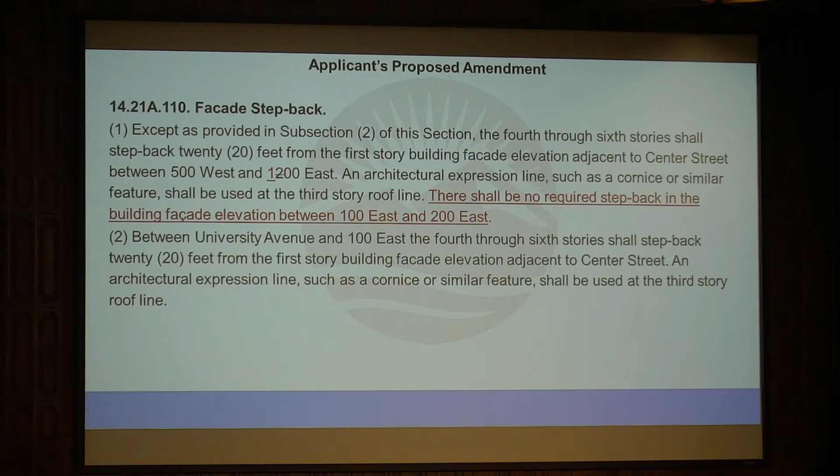Some of the reasoning behind that would be to help development utilize the space along Center Street to its most potential, increasing the amount of floor area in a new development, rather than having that stepped-back area become void space along Center Street. It would also help anchor the corners with buildings that have a more substantial presence, so people coming into downtown can feel a sense of arrival, by anchoring those corners.

Some other concerns might be protecting the historic district, which we want to make sure we're doing in our historic downtown. That will be handled through existing design standards in our code, which help protect the character that's there now and what we want to see there. Title 16, our landmarks preservation title, will also govern how historic buildings are treated and protected from undesired development.

Also, another thing would be able to establish some variety in building height along Center Street, so that we don't have a continuous 3-story level, but that there's some fluctuation, bringing variety and character. Currently that's there, but we want to make sure we're able to promote that as well. So those are some of the reasons why staff would recommend approval, but that it apply for the whole DT1 zone. I'd be happy to take any questions.

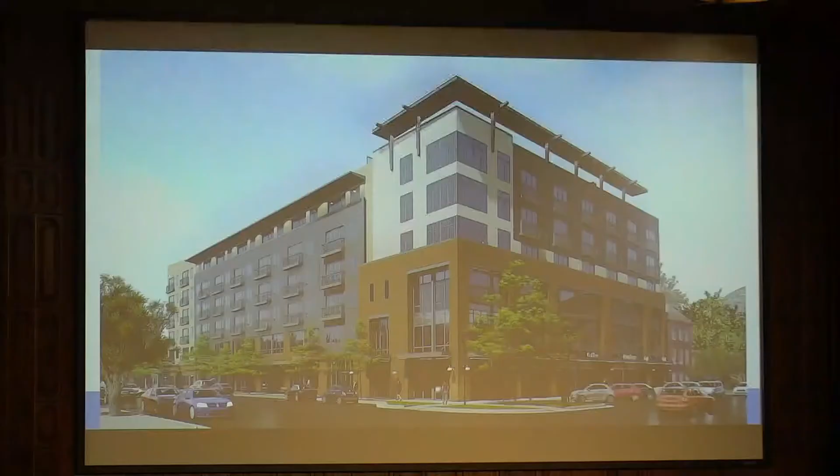Yeah, I believe the applicant brought some stuff as well that he can show. Okay. All right, here's a rendering of the proposed building on that block that the applicant's requesting.

Can you identify where this is? So this is on the street right here, 100 East, and the street here is Center Street. The old historic library, Carnegie Library, is right across the street to the west, and La Dolce Vita, the Italian restaurant, is right across the street also.

So this is where the gas station used to be. Yes, that's an improvement. And so the step back requirement currently would be applied here at the 3rd story and take out this area up here.

Are there any other questions for planning? Okay, if not, I'd like to invite the applicant, Mr. Christensen, to come forward and present his case.

You got that file, Dustin? And do you have the video by any chance? I sent you an email and it has a link. Oh, you're not able to play it up here? Okay, no, it's okay. And I don't know if you have a clicker to run through the slides. Something like that. Oh, perfect. Oh, great. Okay.

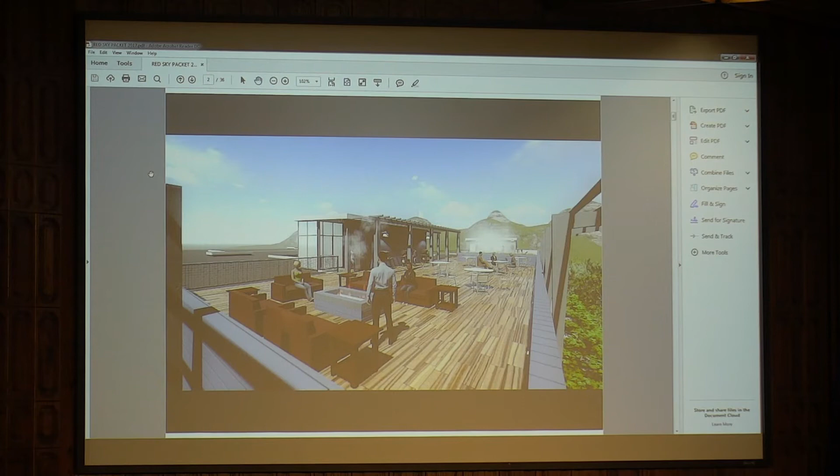That's the rooftop. We're proposing a rooftop balcony with fire pits and jacuzzis. You can go to the next one, barbecue spaces and things like that. That's the table of contents.

We can just go through the next one. So that should give you an idea of where the site is. It's just basically 1 block east of University Avenue.

And I happen to agree with what the staff is proposing from a developer standpoint. Just focusing on our site, we propose that the text amendment be made to just First East and Second East. Part of our rationale was, I think the original intent of that code was to preserve the historic height of Center Street, and a lot of those buildings, whether it's the Knight Building or others, they go up 3 stories. So I think the idea was they were going to preserve that history, and then if anything was added to the top of it, it would be stepped back and then go up.

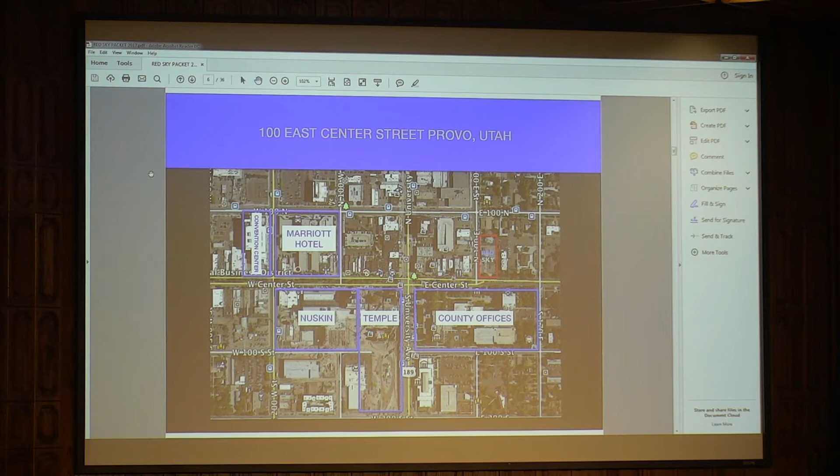And so as we looked at that, we said, well, our site is much different than the rest of Center Street. If you continue to click through, the scale of the buildings on First East is different than the rest of Center Street because the county offices are set back, like I want to say maybe 150 feet or something off that corner or off the street.

There isn't really a historic scale there like the rest of Center Street. If you look at the Nu Skin building and everything else along that street, it's about 30 feet wide, and I used Google to measure it.

I measured it off by about 5 feet, so I think it's actually about 35 feet. We're about 150 feet back from the building across the street. If you look at the width of all the buildings along Center Street, it's about 130 feet, whereas our block is closer to 245 feet. So you don't have that historic scale we were talking about.

As for the architecture, once you get east of University Avenue and even east of 100 East, there's no historic architecture to maintain. We've got a garage, and the county offices, which are sort of mid-century modern. If you scroll down you can see the architecture obviously isn't historic, so there's nothing to maintain there. Focusing on our site specifically, we don't have any history to maintain.

Dustin brought up a great point that as you go along Center Street, the Historic Preservation Committee has required that you maintain the historicity of the buildings there. If you were to expand this to all of Center Street, which I think is a good idea, there's a way of maintaining that historical facade while also eliminating the setback. This is what our project looks like right now, and I think anything would be an upgrade to what this site is currently.

So 20 feet again cuts out all of that space, and then you're like, well, what do you do with all that space? I can't lease it, it's more balcony than anyone needs, and it's just extremely inefficient.

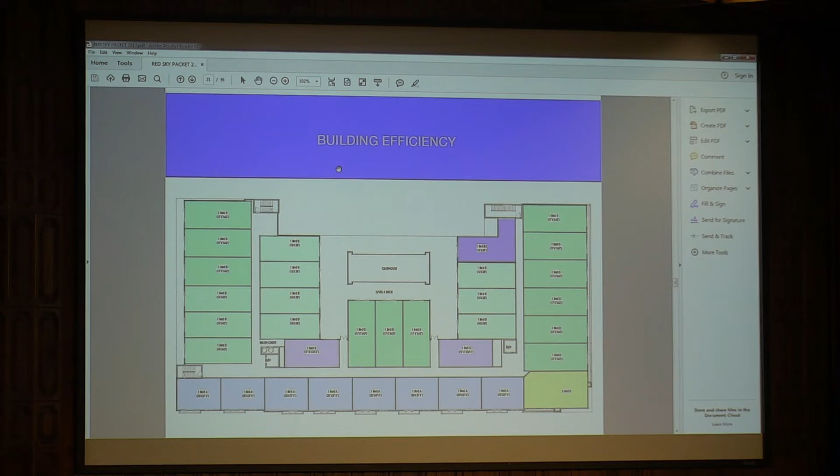Now, the way our building works right now is, in order to articulate that break, which I want to do—I don't want a flat wall, we want it to look good and have good curb appeal—on this corner here, would you mind going back to the elevation, the very first page?

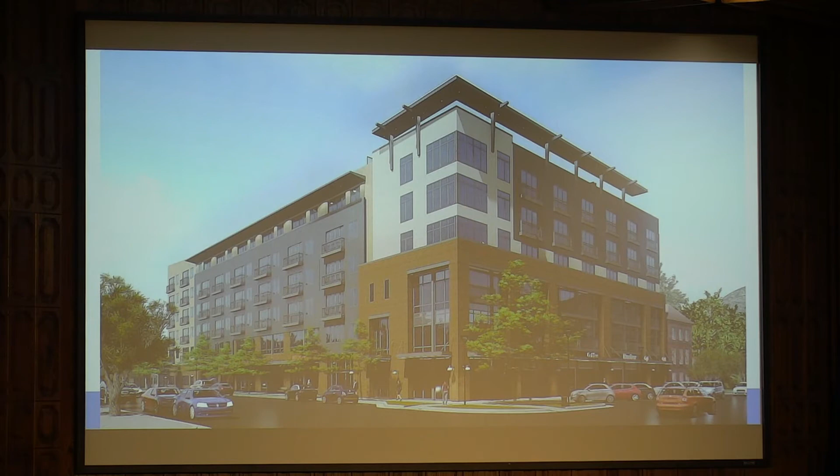Well, it's actually different. Go back to my PDF, the first page of my PDF. There you go. There we go, so if you look at this—

It can be articulated stronger with the cornice if you want something. Okay, you've got to talk to the microphone because people are listening to this online. Oh, okay. So if you want that articulated stronger, we can have a cornice that flutes out or something.

That steps back a foot, and then we step our windows back a foot, so we're trying to create shadow on the building so it doesn't look like a blank wall. Then as you transition around that stucco corner, this steps back 2 feet, which gives a fairly distinct break and also some internal balcony space.

But what happens is any more than that—you take out a foot across my unit, another foot, another foot—it's 1 foot by 130, multiply that by our rent and so on, and it adds up. I know it sounds ridiculous, but honestly, every square foot here matters.

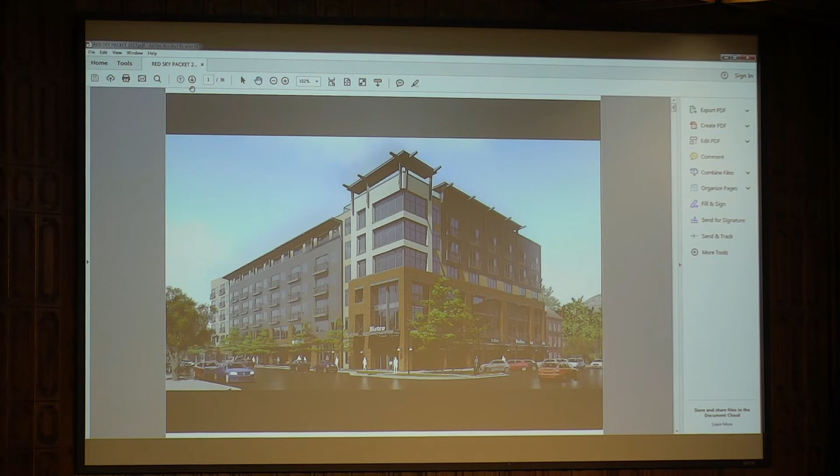So if you wanted to say it has to be substantially similar, or we step back 2 feet and a foot on the corners to make that articulation, I would be totally fine with that, because I agree we don't want a blank wall. I don't know if that overly complicates the ordinance or not.

Ms. Jensen, in your experience, how significant is it to have the 1 or 2 foot step back, but then a significant change in materials, in terms of accomplishing some articulation?

Well, I think my question in response to that also takes a look at the balconies that are hanging over that edge. Are those just Juliet balconies? Are they just like a couple feet deep?

So you don't really step out on them or use them? It's enough. We've got sliding front doors. On those, we've got 3-panel doors on that side, and I think probably 2-panel, those may be 3 also. So it's enough to slide it open, so you're getting great circulation right there.

I'm just wondering if we require something like a 5-foot setback, which clearly articulates a building change, or step back, not setback, that also then provides space for a real balcony that doesn't overhang the public right-of-way if we're building to the 0 lot line in the downtown district. So you accomplish the goal of articulating that historic character, but also providing additional amenity for the tenants, and still hopefully within the realm of feasibility financially for the projects.

Would you be willing to do 3 feet? 3 feet is enough, a wide enough balcony to get a barbecue out on part of it, but we kind of really don't want barbecues and other things hanging out on the balconies on Center Street. But if that's what you're going after, like I said, 5 feet would still be, in my opinion, too much. But if you can go with something like 3, and then on the corners do something like a foot, so we're not giving up so much square footage wrapping around that entire corner. Does that make sense?

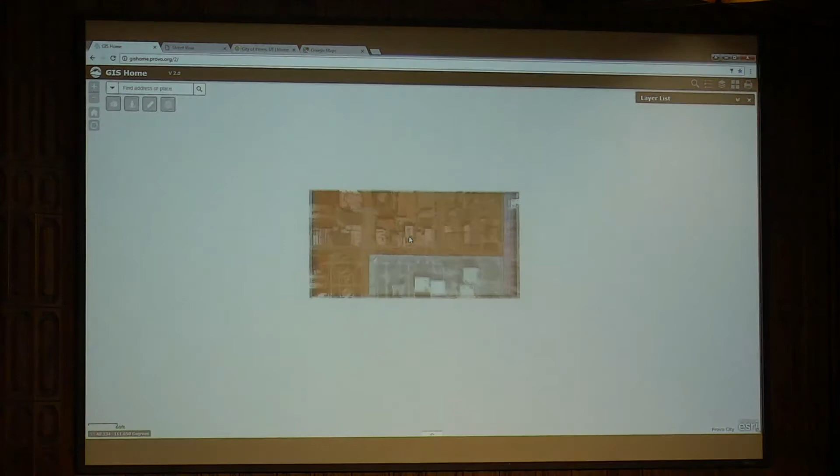We had that map up a minute ago. Here we go. So obviously the darker color is the downtown core, downtown 2 zone. Lighter color is the downtown 1. And the purple at the bottom is the ITOD zone.

And that concentration of more affordable units tends to be more down in this area. In Franklin and South Franklin neighborhoods, that's where that concentration of affordable housing tends to be.

Ms. Ellsworth? Mr. Peperone, are you saying that it doesn't matter if we change the minimum size, the council's not going to like it?

No, I'm saying that, again, as this has continued to be discussed by the City Council, Mr. Harding on the council and I have asked the council to try to articulate exactly what it is they're trying to accomplish, because when we clearly understand that, we can tailor the ordinance much better. And they're still having that discussion.

No, I'm not saying at all that I think that they'll reject this. I think it's just going to cause them to have that discussion sooner rather than later.

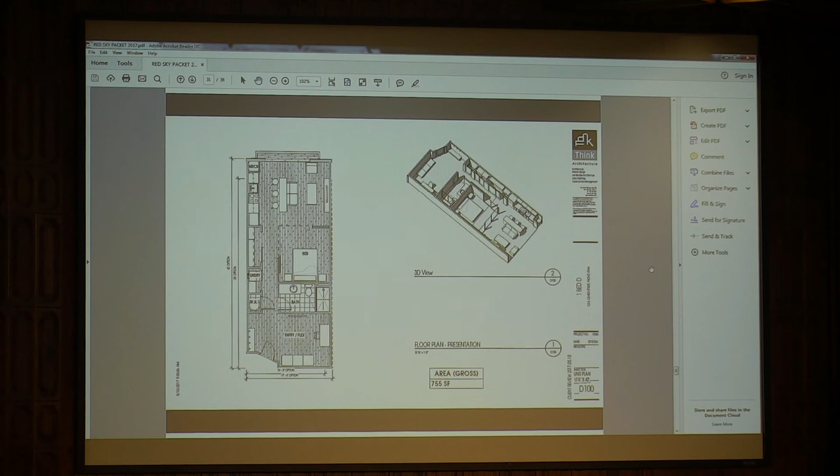So our unit plans, would you mind going to the next slide? This is one of our unit plans, 755 square feet. These are the ones that look out onto Center Street. We come in, we have a flex room. It's intended to be an office because for the most part, 2-bedroom units are for a family or couple that wants to use an office or maybe have it as a nursery. They don't necessarily need a second bedroom, so we're giving them an office or something that could be used as a nursery. Then you come in and you've got your 1-bedroom, which we anticipate will have sliding retractable doors so it opens up onto the whole unit. And this is just a 3D version of what that would look like.

Kitchens are important to millennials. They eat out, but they actually like to cook a lot too. And so all of them have a full functioning kitchen with a bar.

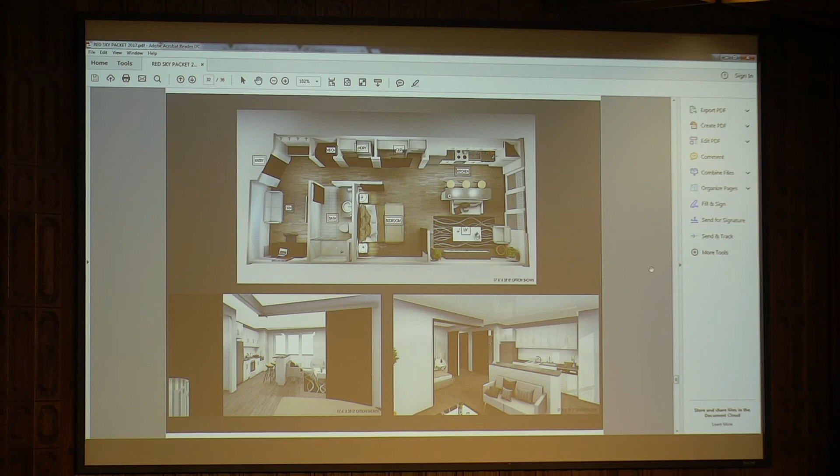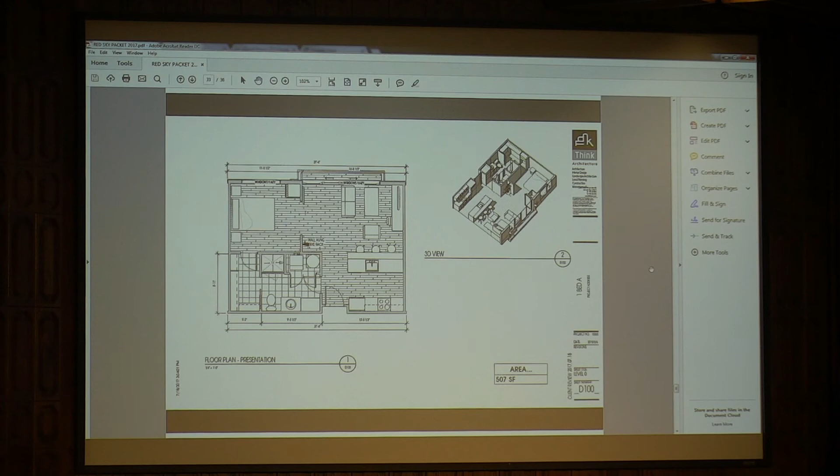We don't have any studios, but this is our smallest one-bedroom, and it's very functional. It has a fully functioning bar, lots of windows to let in natural light, and a place to hang your bike. It's a small unit, but extremely functional, with a ton of windows looking out across the street at the temple, and capturing Y Mountain on the backside and Utah Lake.

Sorry to interrupt, but how big was that one again? That was 507 square feet.

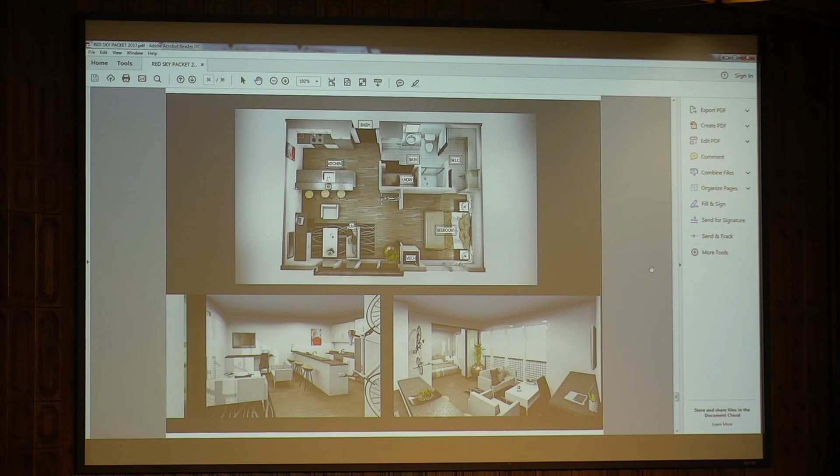At the end of the day, I think from the city council's perspective, they think of what would I want, or what would I feel comfortable living in, or maybe from the perspective of trying to bring families downtown, when in actuality, the people who are coming ask why Provo is different than, say, Orem or Draper. It's because Provo actually offers a lifestyle. Orem doesn't—it's one massive strip mall, and I wouldn't build this in Orem unless it was like what they're doing next to the mall. Draper's the same way; it doesn't have a downtown core.

This is one of the only cities in Utah outside of Salt Lake that actually has an urban core, where you walk out, get on the BRT, go to FrontRunner, have dinner, go to Velour and listen to a concert, or go to a comedy club. It literally has an atmosphere. And then you have 70,000 students right there, which creates its own young scene, and people want to stay in that scene.

That demographic, those millennials, is looking for something like this, not an 850 square foot apartment they can't afford. I think what we're proposing here is consistent with what the market demands. In fact, Jeff Neese, our market analyst, when I told him about this, said it's completely running the opposite direction to where the market is going—it's not going bigger units, it's going smaller units. Hopefully you'll take that into consideration and understand the demographic we're going after here.